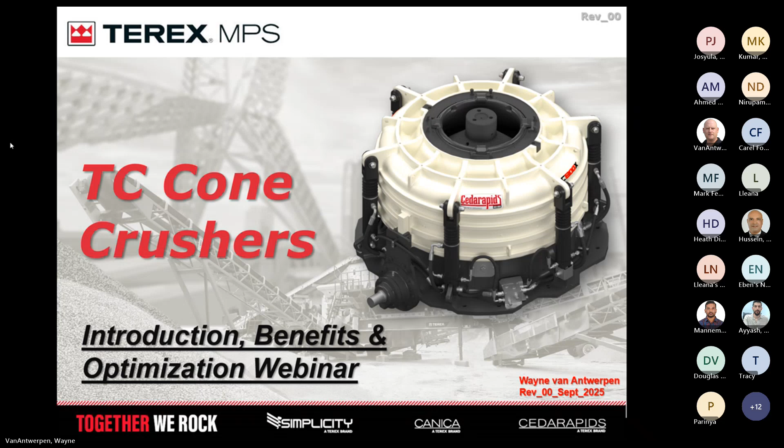Hello everyone, thank you for joining. As Mohit has introduced me, my name is Wayne VanAntwerpen. I work for Terex, and I've been with Terex since 2003. I've got about 30 years involved in the crushing and screening market. My current job title is Crusher Technology Product Manager, and basically my responsibilities are around chamber development, technical support, training, etc. for all the Terex aggregate brands.

That includes the track brands, Powerscreen, Finlay, EvoQuip, Magna, and the broader Cedar Rapids / Terex MPS across the world. The only chambers I don't really partake in too much with Terex are the VSIs, the Canica side of things. I do support where I can, but my main focus is primarily around jaws, cones, and horizontal shaft impactors, and any new technology we're looking to bring through.

So the agenda for today is a brief introduction to cone crusher styles and different types, the TC cone history, just very briefly where it stems from, an intro to the TC cones and its model ranges, the anatomy of the TC cone, and an overview of the key features and product benefits. I'm not going to cover the broad spectrum, I've cherry-picked some of the more pertinent ones for this webinar - our automation package for the static units, operational tips to enhance productivity and improve uptime. Again, I've chosen a few that I think would be easier to adjust and have the most profound effect. Then a basic summary of key takeaways, Q&A, and the closing.

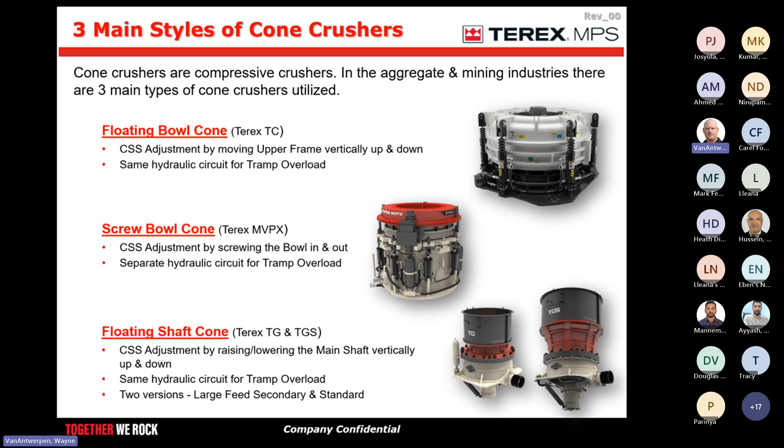You see the old style over here, similar to what you'd probably recognize from a Symons style cone. The big difference here is it had roller bearings, roller thrust bearings, parallel thrust bearings between the cone head eccentric and the main frame. It was still screw adjust with spring clusters on the outside, no hydraulics there to accommodate any overload condition. I've labeled it as a hybrid. The reason is the head and shaft comes down into the deep eccentric, and there was a bushing there, although in these areas here were roller bearings.

Then Pegson eventually went on and created their own autocone, the Mark I, with the roller bearing design as well. But now they converted from the screw style to a floating bowl type arrangement. That was a two-piece upper frame. This is the upper frame, and it was two-piece, bolted together. Then they moved on.

They upgraded that design to a Pegson Autocone Mark II. This is around the mid-80s. It's when they introduced no longer the parallel thrust bearings but a tapered thrust bearing. Still floating bowl style as you see it here, but the two-piece arrangement.

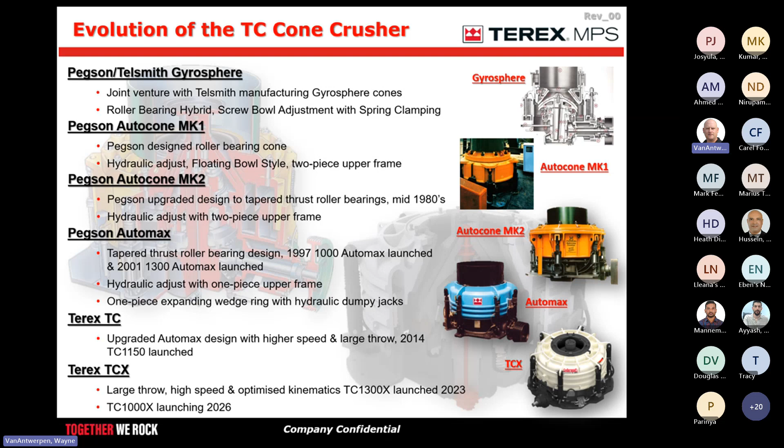Again, Pegson, if you recall from the 90s and early 2000s, was called BL-Pegson. How that evolved: you had Brown and Lenox back in 1836, and then you had Samuel Pegg and Son, which became Pegson, and they were functioning in different markets, not the aggregates market.

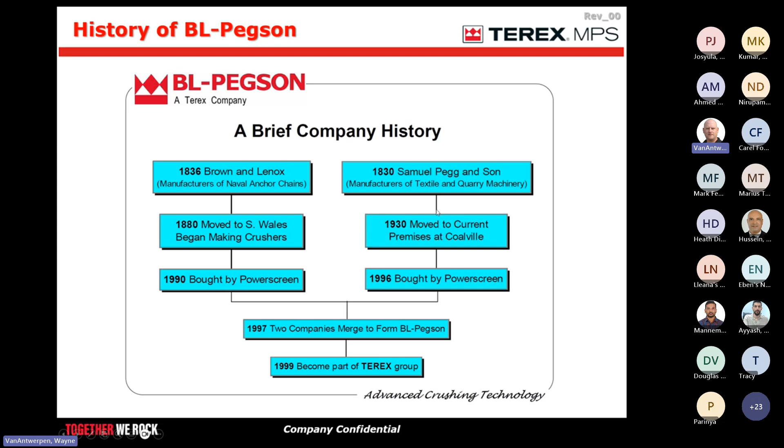But as they came down, moved on, Brown and Lenox began making crushers in 1880. So Pegson moved to their current premises, where we still build most of our crushers today, in Coalville. In 1990 and 1996, Powerscreen purchased both Brown and Lenox and Pegson, and then merged the two companies as BL-Pegson, based primarily in Coalville. Then in 1999, Terex bought out Pegson. So you can see how the name BL-Pegson came about and the history of where they started and how long they've been making crushers.

And just to give you a little bit of a visual display of Pegson in the days they were doing mobile equipment, mobile crushers many decades back. It wasn't just the old track ones that came in the 90s and 2000s plus, but from a more non-tracked environment, you got the mobile cones, as you can see from the Pegson, in a bigger multiple crusher setup.

With two crushers on it - I think you can see there's a jaw here, a cone there, and a single cone crushing plant. That's a spring cluster, as you can see. I think that would be the older gyrosphere style with a horizontal screen, but it'll give you a good perspective.

You can see the size of this plant, and here's the more modern variant where we have a big structure - especially now in Cedar Rapids in America, you've got the 7x20 horizontal triple shaft feeding into the 1300X. It's the first real mainline 400 horsepower cone that you'll find on wheels, and we have much bigger structures going

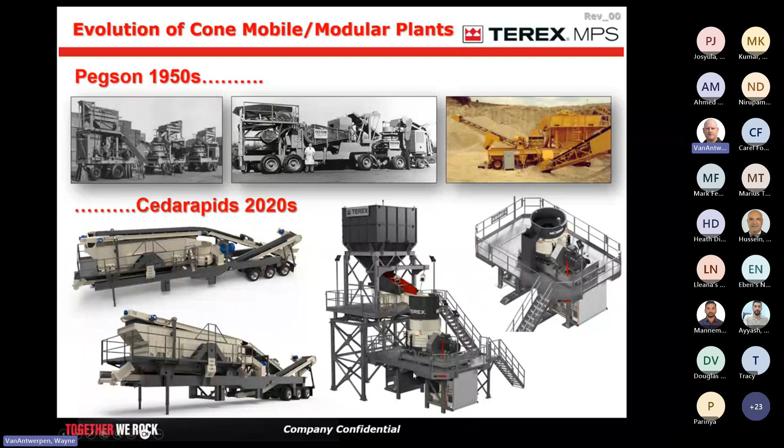into the modular section that we'll find globally as well. So just a brief introduction to the TC cone.

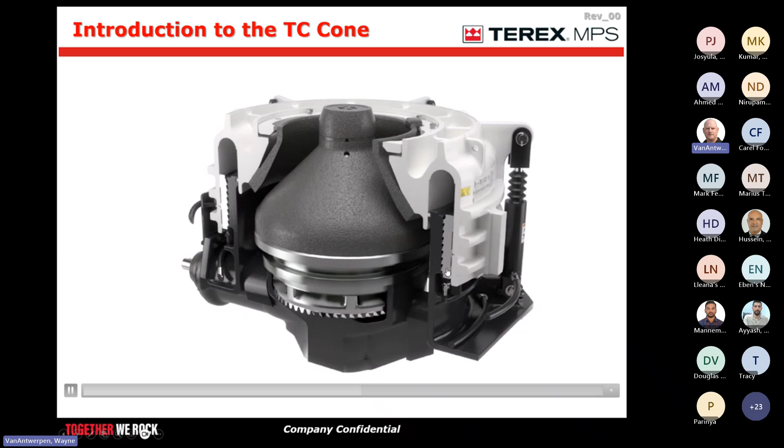You can see the roller bearing design as we're going through, with the one-piece upper frame. I'll focus a bit in for later on with the wedge ring design, single hydraulic system on the outside, allowing the cone to go up and down, and tramp relief. So this is very basic - you'll see the roller bearings in there.

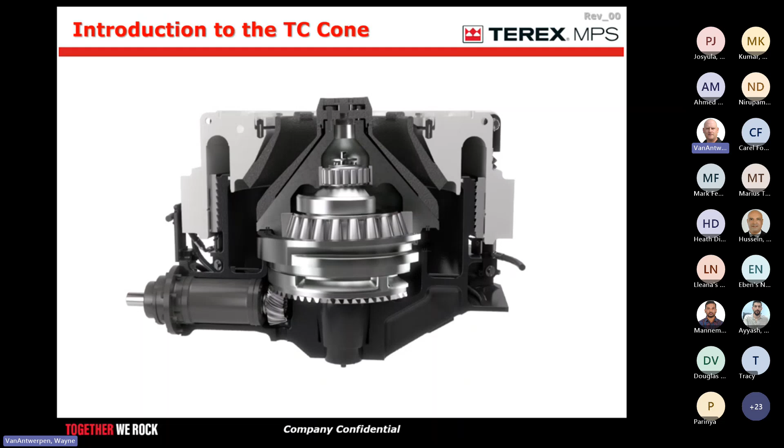We have a long throw, short throw - there was a long throw, short throw on the 1000, but we've improved the throw and improved the speed as well. The 1000 has two upper frames to accommodate the different liner configurations, where the 1000X only has one.

The 1150, which came into production around 2014, 300 horsepower, roughly 1150 diameter head, also with two throws, long and short, and one upper frame.

The 1300, 300 horsepower, nominal 1300 diameter, with only one eccentric throw, two upper frames to accommodate the liners. In the 1300X, we've taken the 1300, same head diameter, increased the throw and increased the power up to 400 horsepower. So it has two throw options and the one-piece upper frame.

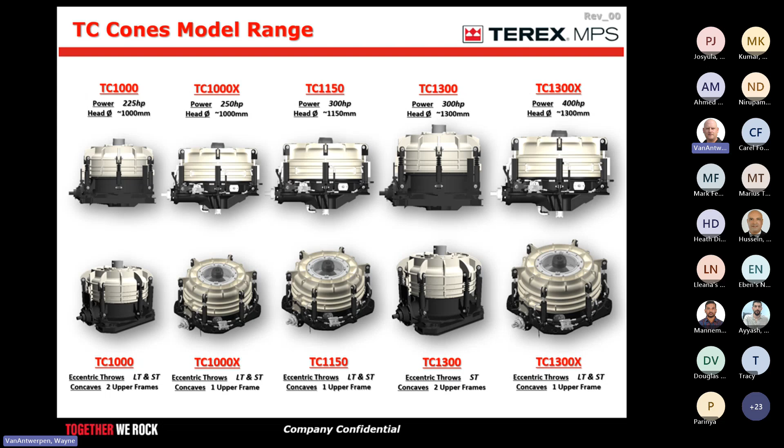The anatomy, the internals, and what makes up the TC cone - I'm not going to go through everything. This is the TC 1300X. The main difference you're going to see here is the introduction of the optional hydraulic anti-spin that we have going through. That's the big difference you're going to note.

One piece upper frame, fixed main shaft, and here you'll be able to see we have the upper thrust bearing, lower thrust bearing, and we have the radial bearings as well, between the cone head and the eccentric, and the eccentric and the shaft.

The hydraulic system on the outside, which controls the adjustment as well as tramp relief, and we have the wedge ring on the inside between the main frame and the upper frame, and another smaller hydraulic circuit, which we call dumpy jacks, that control this expanding ring.

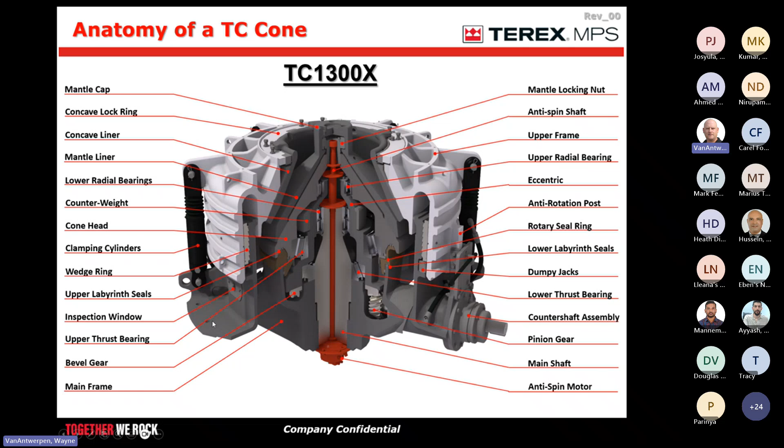I think those are the main components we're going to look at for the rest of the webinar. So what are TC cones? What are they primarily, and the primary focus is designed around these 5 pillars.

The strength - we can crush across the board, really hard, tough, arduous rocks. The performance is exceptional, especially with the new TC and TCX lines. Versatility - what the cones can do, the different types of feed, the variance in feed, and the options that we have that allow the change up in the performance to suit given applications.

Ease of maintenance - very easy machines to work on, easy to do maintenance, strip, do liner changes, etc. And the bottom line, coupling all of that, encasing all of that, is the reliability. Very reliable cones - you can depend on them going through changing conditions and applications.

As I mentioned, it's important to appreciate the arduous applications that this cone can safely work in. When I say safely, I mean safely in the sense of ensuring reliability and performance.

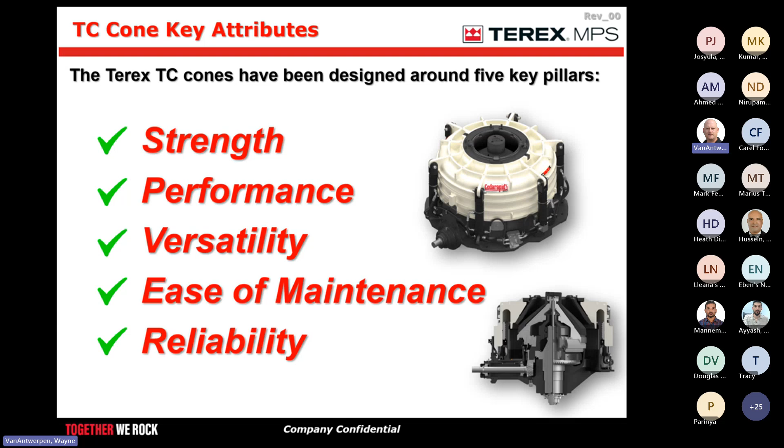So just breaking it down to the key features we have on the TC cone: superior product quality, market-leading performance, especially on the track plants. That's where it's most dominant, but there's been a lot of good inroads over the last 15 odd years of

introducing these cones into the market in static situations and modular and mobile, meaning on wheels. But the tracked platforms have been supremely successful over the last 2-3 decades, leaving it as the market #1 tracked mobile cone crusher, highly placed in secondary and tertiary positions in all the aggregates and mining markets.

The hydraulic adjust system, as I mentioned, the one upper frame, gives you a precise, reliable CSS control. It doesn't fluctuate. It holds its setting, allowing for that superior quality without a fluctuating CSS. You can have consistent output grading and overload protection, giving you an immediate return. If you have an overload condition, it'll open up and return back to its original setting.

The low friction roller bearing design, compared to what you see in the market with bronze bushings, the most important thing to note is the efficiency and effective power utilization you find with the low friction roller bearings, where bronze bushings generate a lot more heat. That's a loss of energy, not only inside the crusher and the power supplied, but then you have to add more energy to keep that oil cool — higher flow rates of oil, bigger coolers, etc.

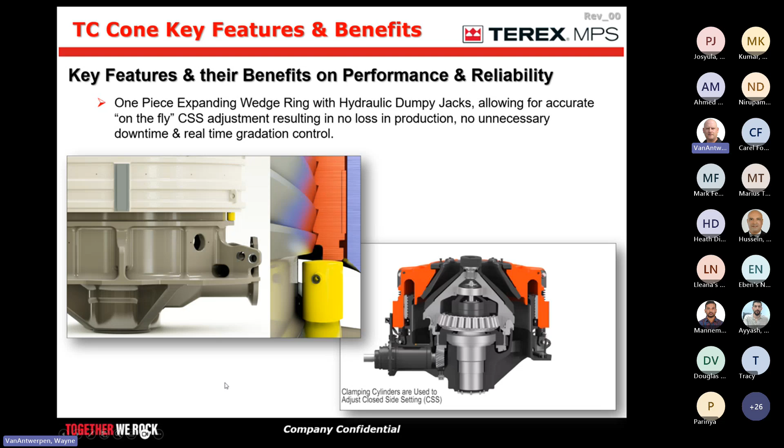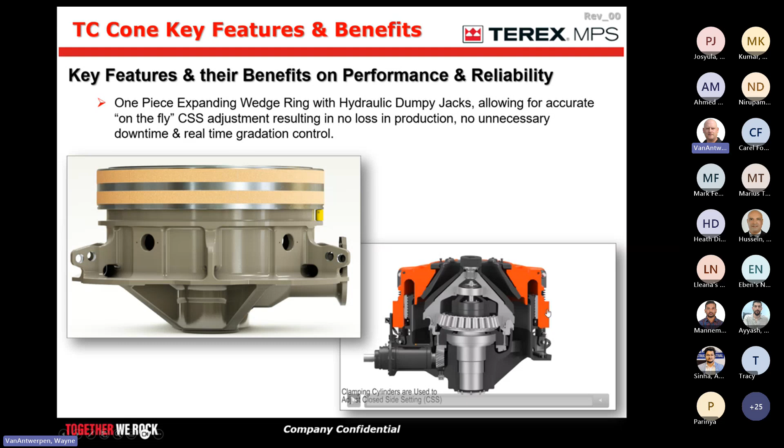When we energize the dumpy jacks, which I'll show you in an upcoming video, it pushes and expands that wedge ring further up the threads, holding the upper frame a lot more stable, allowing it to hold that particular setting with the aid of the cylinders on the outside, precise, and still allows you to make adjustments whilst under load.

If we look over here, touching down, you can bring the liners to touch, and then if we have a closer look at the wedge ring, that's with it energized. You can see by the threads, we can de-energize it, making the upper frame easier to remove for service.

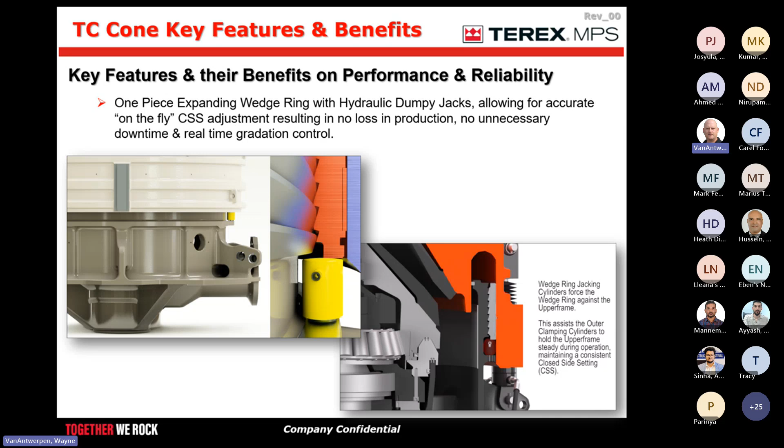The other point to note is that the initial point we showed you is also how we check liner wear. Whilst not crushing, or the cone is static, not running, we can lower the upper frame down until you get a touch between your mantle and concave, and that goes through to our automation package. We can record the actual wear you're inducing on those liners, and alert you when you're reaching or approaching your wear limit.

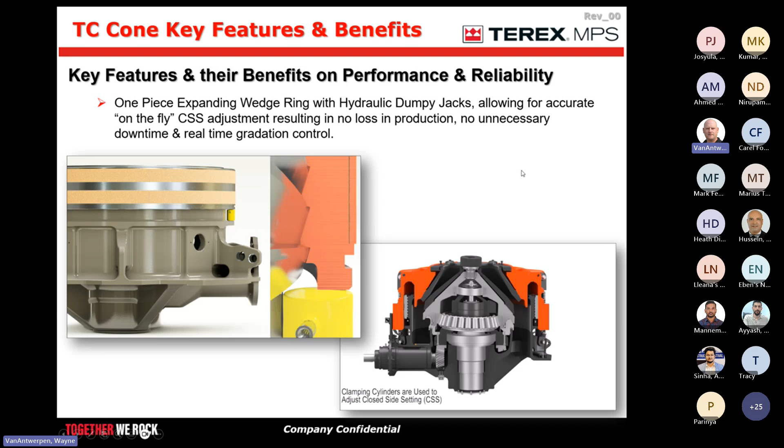I mentioned the low friction roller bearing design. This just shows you how they go together. You've got your lower thrust sitting on top of the shaft, your two radials, and the eccentric that sits above that. It too has an upper thrust roller bearing for the cone head to sit on, there's a counterweight, and another radial bearing that sits between the eccentric and the cone head.

I'm just going over some points raised previously. One of the big noticeable differences between a roller bearing design and a bush style cone is the size of the lubrication tank and lubrication flow. Giving you a rough example, this TC1300X runs around 30 liters a minute, where an equivalent 400 horsepower cone that runs on bushings could be up to circa 140 to 160 to 180 liters a minute.

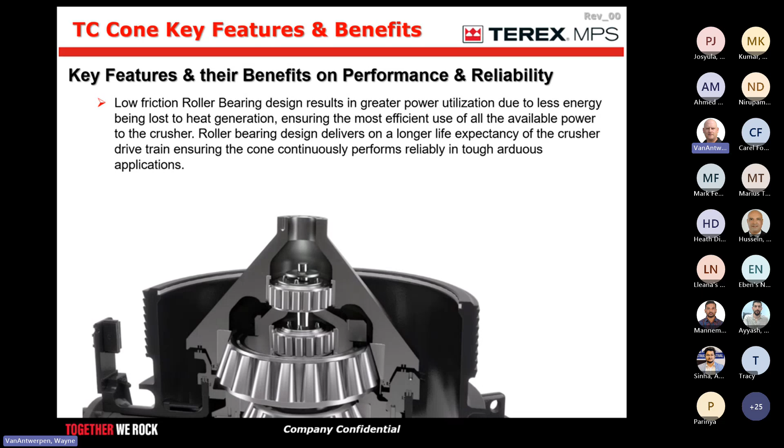The reason you're pumping so much oil into a bush cone is because it generates a lot more heat, and you're trying to dissipate that heat, removing it out of the crusher back to the tank through much larger coolers. So there's a lot more energy involved in pumping the larger flow, and more energy involved in cooling that oil. We have a much smaller oil cooler on this style, much lower flow, and you're not wasting energy because you're losing energy with the bushings through the heat.

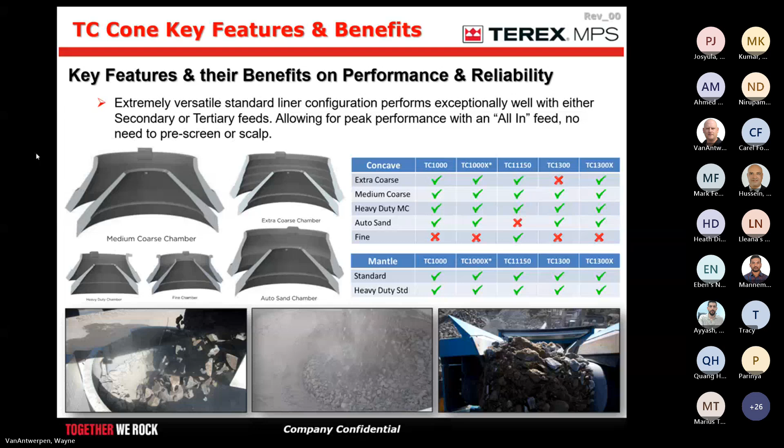Okay, hopefully you guys can hear me. I'm back again, got it restarted. The other good, strong feature with this style of cone, as I mentioned, is the liner configurations. We don't have a large array of liner configurations. Our standard liner that we deliver the cone in is what we call a medium coarse.

It's just a name associated. If you look at other manufacturers, and even some of our other styles of cones, you'll go down extra coarse, coarse, medium coarse, etc. As you go down in those, the nature of those liners is your maximum feed size will get smaller and smaller. Our medium coarse is a very versatile liner, and as I say, I think it's called a multi-purpose or a jack of all trades, being our standard liner.

So the first thing I wanted to show you, our medium coarse, and all these cones that I'm showing on these videos are running with the medium coarse. We've got a straight secondary feed down here on the bottom left running through our medium coarse. We've got a tertiary feed going in, another medium coarse with great performance and output. And then we have another one here, and this is what I'm sure we've all heard about, all-in feeds. This is actually pushing it to a bit of an extreme here where there's a lot of sand. This is obviously a sand and gravel application.

Just showing you again the resilience, and a lot of other cones that we will find in the market, you could not feed a secondary cone with that amount of fines in it. I'll just stress again, that's not really necessary for them to do that, but for this particular site they didn't have a pre-scalper, and the cone performed safely, reliably, and still at a very good performance level.

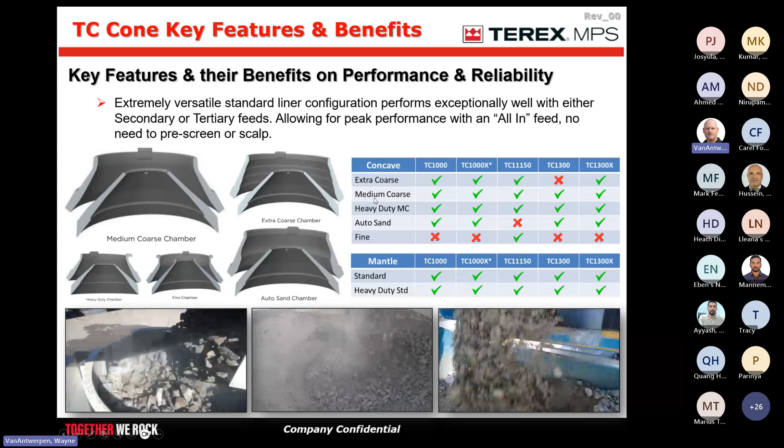The bulk of the other machines all have medium coarse. The TC1300, the older design, doesn't have the extra coarse. So there's our liner made up. But as I mentioned, the medium coarse is the jack of all trades, an all-rounder. It can work in secondaries, tertiaries, I've even seen it in quaternaries. And in my case study that I have at the end, making sand, they're utilizing a medium coarse liner. So you're not going to find that type of versatility with one liner on any other style of cone out in the market.

The other benefit, I wouldn't say much with this because this is filling the voids, but an all-in feed, what is the benefit of an all-in feed? Generally, a lot of OEMs would say you can't have, or you shouldn't have, or they strongly recommend you don't have more than about 10% of material passing through the crusher that's smaller than the CSS it's set at. With adding in material at a respectable level without flooding it like you can see on the one on the right, you allow for more attrition crushing, rock on rock crushing, giving you more superior shape as well.

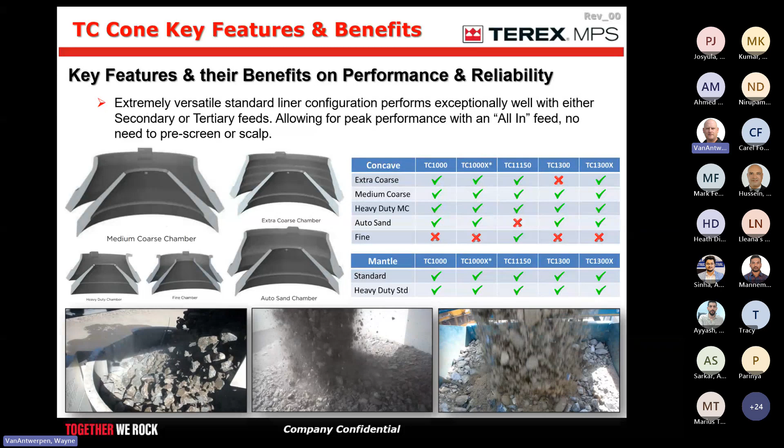When you start feeding in a very heavily scalped pre-screened material, your opportunity for a more flaky output product is increased. So putting one style of cone, like a TC cone with the medium coarse, in a secondary, you don't necessarily need a tertiary down the line to shape up your product. You could get away with it with an all-in feed on a two-stage plant.

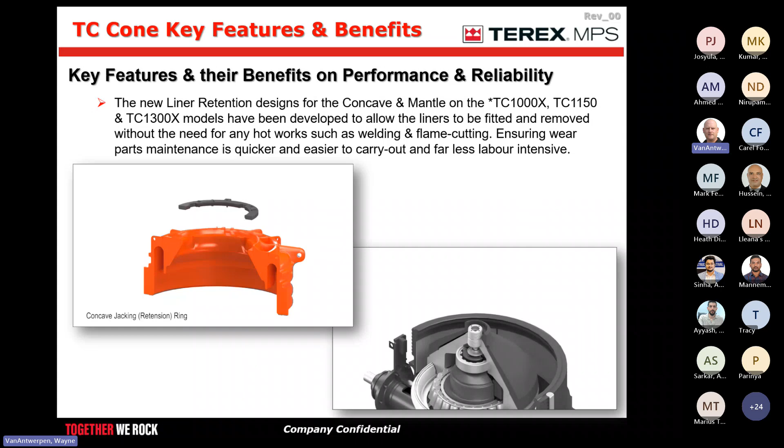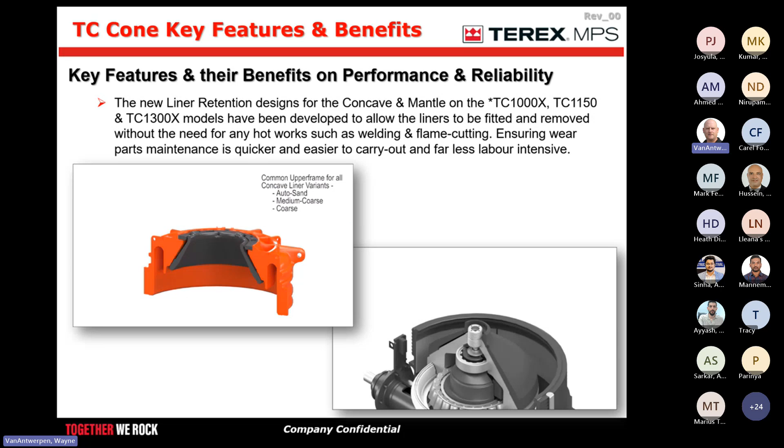Looking at this, it's more in line with our more modern TCX line, our liner retention systems. In the video showing now is our concave, where we have a tension ring or locking ring that'll go down. You bring in the concave with the lugs, rotate it, and then use jacking bolts to lift the ring up and hold the liner under tension. The benefit and beauty of this is you no longer need flame cutting to remove the lugs or the liner. You can drop the tension off the locking plate and just turn the liner out. So that's the principle there.

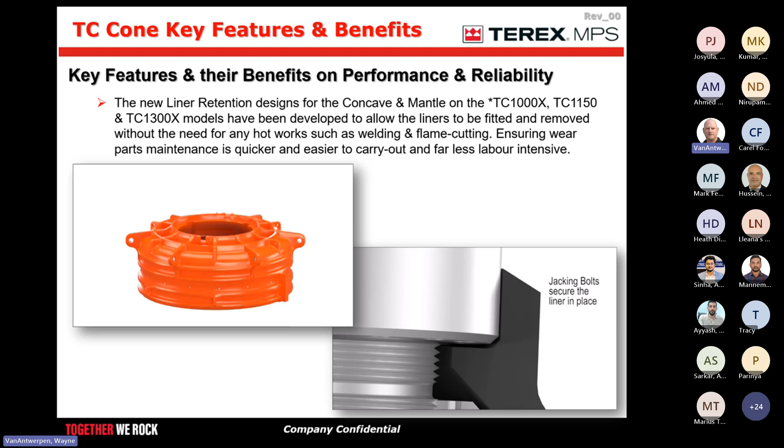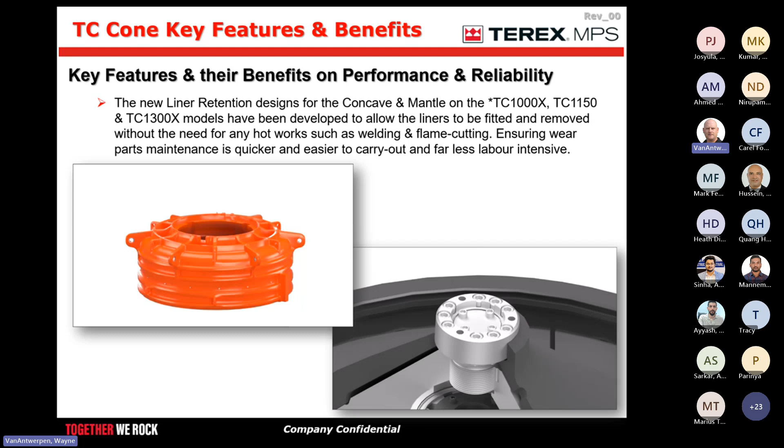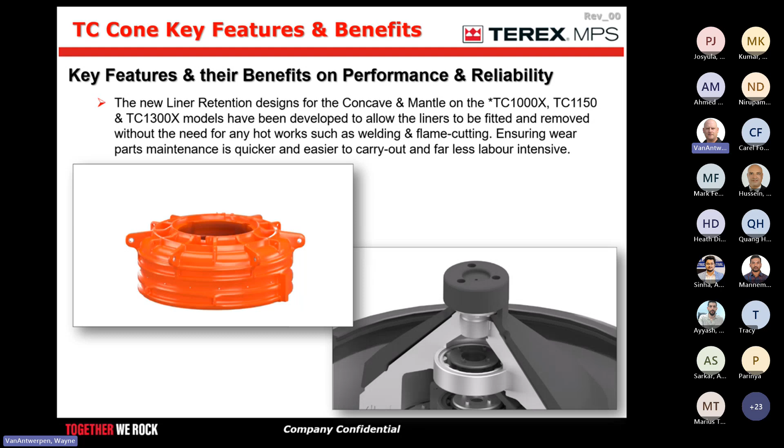Then this one here is on the mantle itself, and a mantle locking nut. As you can see, you've got a lock ring that comes down, similar to what you find on the concave, where we bring the ring down, bring it back up for some clearance, put the jacking bolts down, and jack it down to hold the liner under compression. The benefit is you don't need to cut the burn ring or cut through the manganese to remove the expansion that the mantle will endure during crushing. You can do that with just backing off on the ring. No more cutting or welding is required. Far less labor intensive, very easy to do as well, and good for the environment.

The automation control we have on our static TC cone, when I say static I mean non-tracked, is what we call the A6 system. The good benefit of this is we've taken what we already have on the controls for our track plants and expanded on that with more additional beneficial controls added in for the stationary, where you can't necessarily get that on a track plant. There are good options that we come through.

It's very easily navigable, with icons trying to reduce the amount of languages there, so it's easily understandable for operators out across the field. And you can add in accessories such as level controls that can feed back through the crusher. It's the A6 automation system, where you can adjust levels, and that signal can be sent out to whatever feed control you might have - it could be a belt feeder, a pan feeder, etc. That strongly helps in controlling your level of material and choke feed scenario. I'll expand a little bit more on that when we get to tips on how to improve performance in the field.

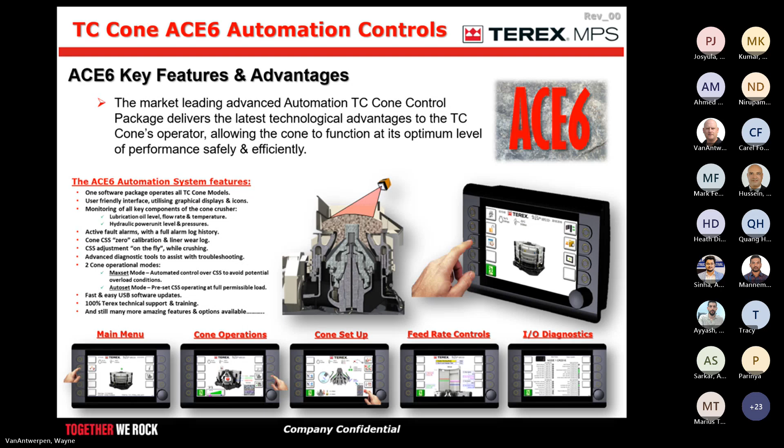Okay, so we're looking at tips to improve. Now this is a very common one that people will stress across the board, but I feel it's probably one of the most important ones: a choke feed scenario. What is choke feeding? It's keeping the material that's being fed to the crusher, and the crusher itself, filled up past the actual moving parts of the cone head. So you're having a level of material that stays consistently above the inlet to the crushing chamber itself.

Your minimum irregular loads, because you've got an even distribution spread around the crushing chamber, your loading is not irregular. You're not having spike loading, which you can expect in scenarios where all the crushing is mostly being done on one side. As the cone head, which is spinning at roughly anywhere between 5 to 6 revolutions a second, you're going to get very much irregular loading and irregular wear, heavy wear. With choke feeding, you get more uniform wear around the whole liner, and both your mantle and your concave are wearing evenly.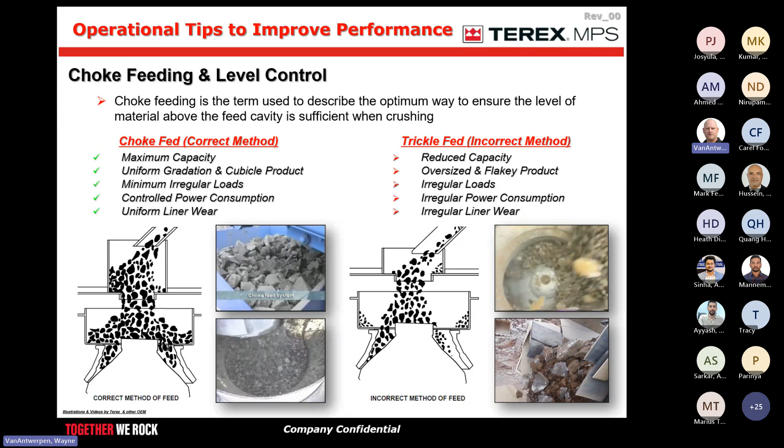So it's not just choke feeding, it's trying to control the level of choke, but it is a proportional type scenario. You don't want to have 2 meters deep of feed, because you're going to cause problems for yourself. As you're going up, your power requirement will go up slightly, proportionally as well. You don't want to go over the point where you start stalling machines, slowing, stopping, pausing feeds, tramping, etc. So it's not just choke feed, it's the level of choke feed as well. It makes a big difference.

In line with choke feeding, and looking at trickle feed - I'll expand on that a bit - on the other side, you could be choke fed, but you're still presenting problems for your crusher. Trickle feed is basically bad feed distribution as well. You're feeding predominantly one side. Sometimes you can fill up a choke as well.

You see this quite often, whether you be feeding from a conveyor or even from a pan for that matter - when it's introduced to the crusher, it's being introduced on one side. So when you start the crushing process up from an empty scenario, you will get a spike in power requirement, spike in load. You could induce tramp events, you could induce bowl float on screw type cones, and even uneven wear, depending on the pace at which you're feeding.

Pushing it all to one side is not best practice. What you want to try and do, whether it's being fed from a conveyor or a pan, is when material is introduced, try to have it fall either vertically down to the center of the cone head, or if you can't drop it vertically down, have it come in at an angle falling more onto the center, or just prior to the cone, the mantle cap. So you're getting a much more equal distribution around it.

The other side, and this is from a choked scenario - you think, well, I'm choked, I should be getting the best out of it - but you can get bad segregation. The most common cause of bad segregation is if you're in a closed circuit system, where your main feed is coming in from one side and your recirc is coming in from another side. You can see on this a perfect example: you've got your smaller recirc material on one side and your coarser raw feed on the opposite side. What's that going to do for you?

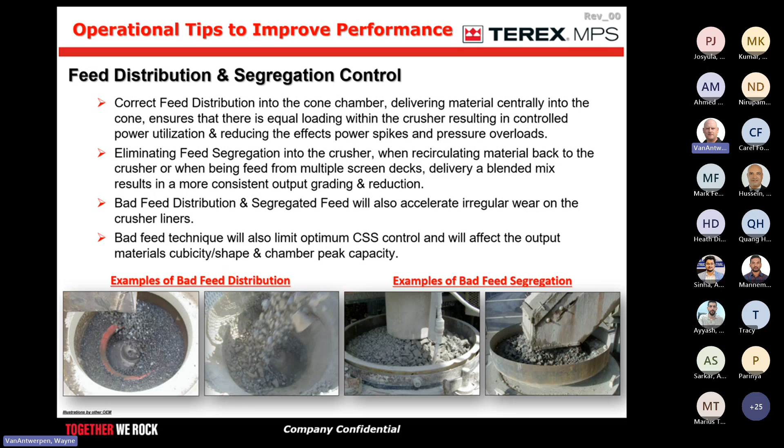Most common thing you'd expect when changing speeds: the faster you go, the more revolutions per second, which means longer retention time of material in the crusher, so your gross throughput will drop off. If you reduce the speed, material passes through quicker with less impacts, so you get more throughput. The problem with slowing the cone down is that material drops further down per cycle, so your power draw comes up. Your reduction ratio drops off when you slow down, and goes up when you speed it up. These are typical things you can expect, but it's never a done deal.

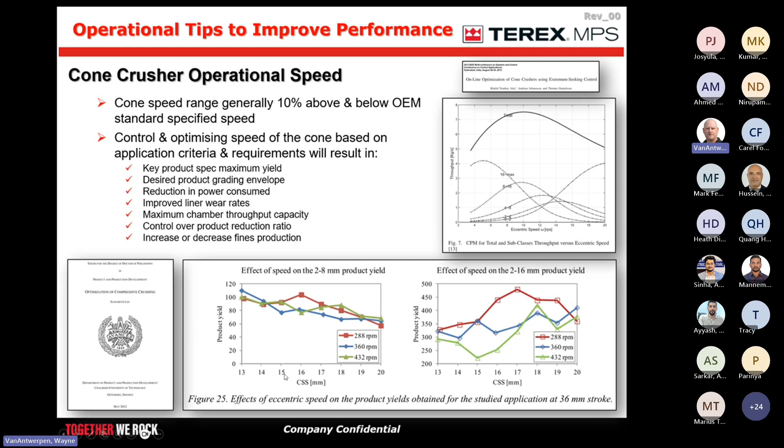It does fluctuate, and unfortunately, as an OEM, we can't tell you exactly what's going to happen. This is extremely dependent on the type of rock you're crushing and the feed grading into your crusher. But the important thing to see is that it's not a straight line, it varies. So if you're able to change your CSS and your speed, you can optimize the particular product yield.

Some additional optimization improvements you can do: when you're initially sizing it, get the right liner configurations. That's the beauty of the TC - it's not special, you don't need a PhD to find the exact right liner, where a medium coarse will practically guarantee you success in just about every situation.

Liner metallurgy - I haven't covered that, but that's a different type of metallurgy, different manganese levels. Does it have chrome? Does it have inserts like titanium or tungsten to give you a longer wear life, improving your uptime? The supplied power - making sure you're picking the right cone for the power availability you have at your disposal for that particular site.

Again, talking about crushing speed - surge bins are very important, or tunnels for that matter. They strongly assist in maintaining a nice choke on your cone. The biggest problem, especially with a mobile situation or in statics, is that by not putting surge bins or tunnels between your different stages, you might get your secondary choked, but by the time you get to your tertiary, it's not choked. That's the most important one if you're running 3 stages, because it controls your output gradation and the shape.

You could get it that your tertiary is choked, but your secondary isn't - there's a knock-on effect. So having some kind of control or feature that lets you maintain choke feed is very important. Overflow chutes as well, on surge bins etc. - you can have it so that if it fills up too much, you get an overflow, so you're not trying to back off to avoid spillages.

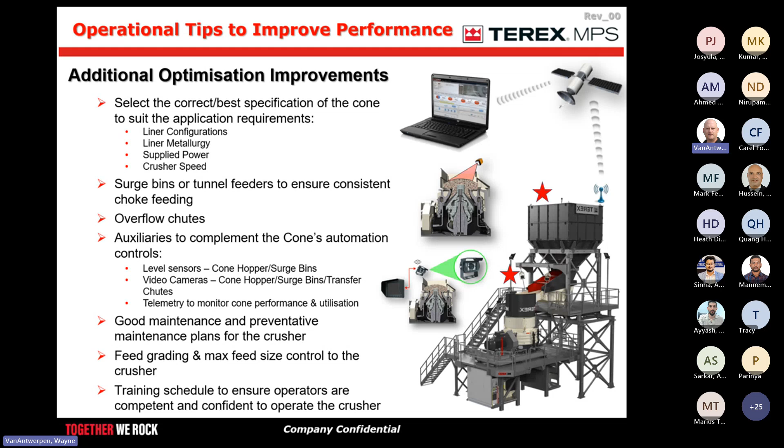And then the other thing, especially in modern day situations, not going back to old school stuff, is keeping your operators properly trained and up to date on how to operate the machine competently and with confidence. That's very important.

So key takeaways from what we've gone through today about the TC: very robust, reliable, based on its low friction design and the overall design the TC brings with the expanding wedge ring, one piece upper frame, hydraulic circuit, on the fly adjustment. That helps you with real-time adjustments to your output gradation, getting your plant balanced. On the fly adjustment makes a huge difference, optimizing your uptime.

I mentioned the low friction roller bearing. Versatility when it comes to the design, as I mentioned, with the liners, having that medium coarse liner, which is your multi-purpose. You don't have to, especially if it's a mobile situation and you're moving from one side to the other, or it could be on one side and you're changing your feed. You don't necessarily now have to go and waste a liner. Your medium coarse will work very well. High focus on our maintenance procedures.

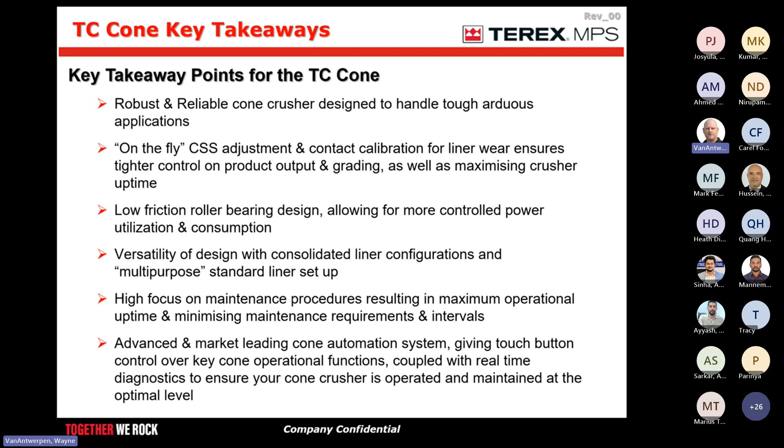I spoke about the liners that we have now with our retention systems. No need for welding or burning. And the automation system, coupled with other features like telemetry, really helps you continually run your cone at its optimum. That's the importance of it, and it gives you a lot of live feedback. It gives you feedback at the machine itself, looking at alarms, looking at potential areas where maybe it's not being operated the best that it can. You're picking up more tramp conditions. Maybe the CSS is not right for what you need to do. So that automation system coupled with the other auxiliaries definitely support.

That's me, and I think I've hit the 50-minute mark. Patricia, do you think I have enough time, or should I answer some questions before we just have a quick look at that case study?

Okay, let's answer some questions before we dive into that very brief look at a case study. Go ahead, have you got that question? Yeah, so...

Question is regarding the consistent input feed size for TC cones. Yes, as the concave wears out it needs to be adjusted for screw cones by lowering the upper frame, screwing in the upper frame, yes, and in floating shaft cone by raising the head assembly. Yes. So the feed size should remain constant only if the inlet has a long parallel zone like a primary gyratory, or if the mantle is lower than the concave.

Okay, look, if we look at a screw style cone, most of the time your concave is the highest point on your inlet, or the first point, and your mantle nut is much lower. So as you start screwing it down, that actual inlet area where rock can physically pass through begins to decrease. It's not so much the parallel zone that comes into it, it also comes down to the profile of the liner itself. It's hard to explain without showing images of it. It's not just down to the parallel zone.

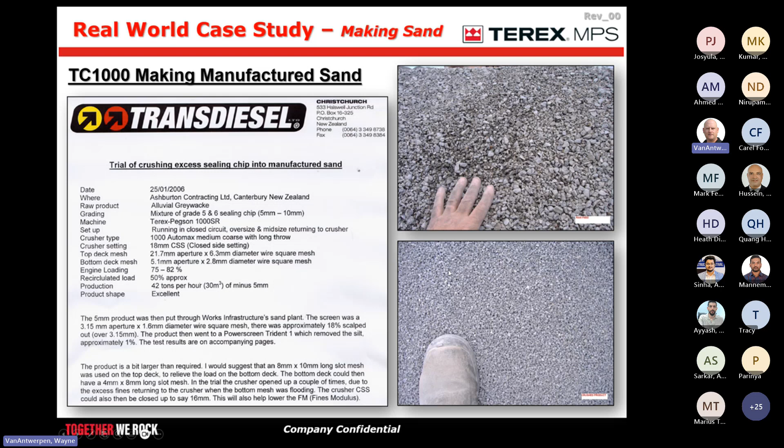You're getting a lot more grinding going on inside that chamber, allowing your recirc to come back, so you're initiating a lot of grinding in there. You can see the recirculating load - he's pushing back, probably 50% is coming back. But you can see the product coming out of it from the feed going into it. There's your feed with the recirc - you can see that 50% odd recirc coming back, which isn't great.

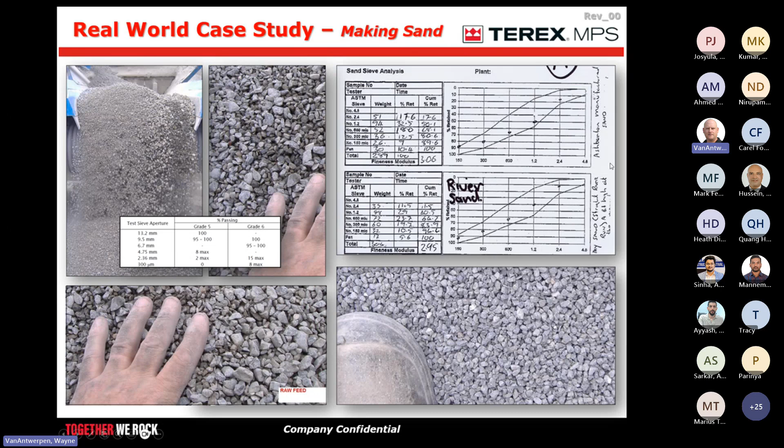After what I've covered, you're getting segregation here. You can see the fines on one side and the more raw feed on the opposite side, because of the way it's being recirculated. You get an idea of the feed size - it's a mixed size, not exactly as laid out in passing. You can see there are some bigger flakes in it. So that's the feed. Here's your product, giving you an example of the sieve grading of the product they're looking to make.

And there you can have a look, see product output percentages, and then the plant that we're using, a Pegson tracked TC1000 cone with its onboard screen and recirculating belt.

So it's a very brief one, but why I wanted to show this to you guys and share it with you is I think it's a great case study to highlight that versatility that you can utilize with the TC cone. Here I'm making sand.

I know the guys are successfully doing this in India, in the market in India, where they're actually going to sites and getting people to no longer utilize a VSI. We are using TC cones. In India, they're utilizing the auto sand liner configuration.

Guys are successfully doing this in America too, where they're recrushing pea gravel. You see that quite often these days. Guys are talking, you've got a big waste stockpile of a particular size of aggregate that you're not selling, and now you want to reprocess it to try and make an aggregate or a product that you can sell.

A lot of the time it could be manufactured sand, where guys would generally come in with a VSI or even an HPGR type crusher. You can utilize a TC to do that job and do it successfully. And they are doing it.

Unfortunately, we haven't—guys have been doing it, as I say, some of the guys in America have been doing it for over a decade, and they have a certain way to control it to make sure it works successfully.

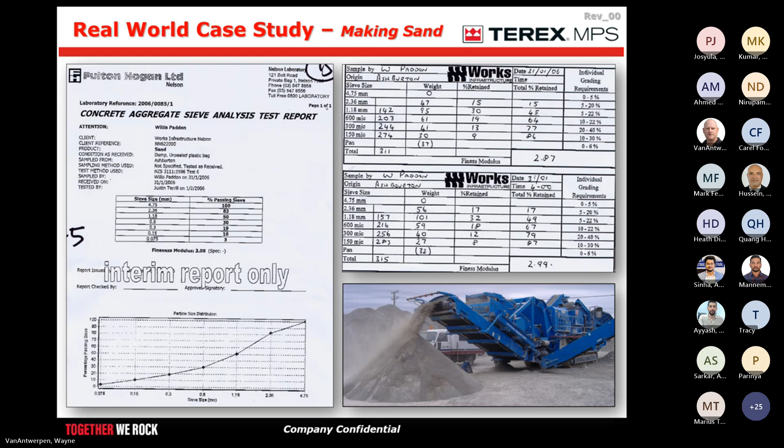Okay, I think that was it. Unless there's any more questions.

Yeah, we have one more question. It's regarding S6 — we need more info on S6 control via remote station. We have been told that we can only have a second display within 75 meters from the main control panel. Question is, can we operate the cone from a remote control room around 150 meters away?

Look, the primary reason why there is a stipulated limit on the secondary S6 control screen is that the communication is via CANbus. With CANbus there is a limit, otherwise you're going to start getting bad interference. So that's where the 75 meter limit comes from.

Now I'm not an expert, it's not my area, but I would think you could get boosters, or a sort of junction that would act as an intermediary. I'm not sure, don't quote me on that, but Wayne said you can get this. That is the primary reason why you can't stretch it out too far.

Just like Ethernet as well — Ethernet you could probably safely do up to about 100 meters, it's a little more stable compared to CANbus. But CANbus over a long distance is limited to that particular distance. That's the reason why you're being told no, you can't go to 150 meters.